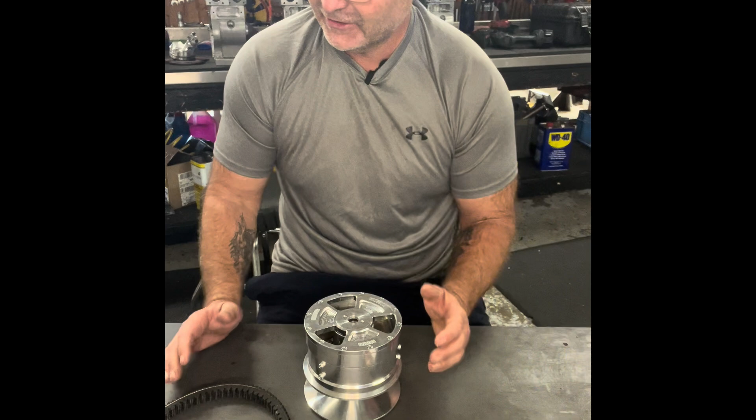We'll get really technical on some of the things that adjust how quick or slow your reaction time is on your clutch. So here we have the polar primary, the belt, a keyed primary post, and a spline primary post.

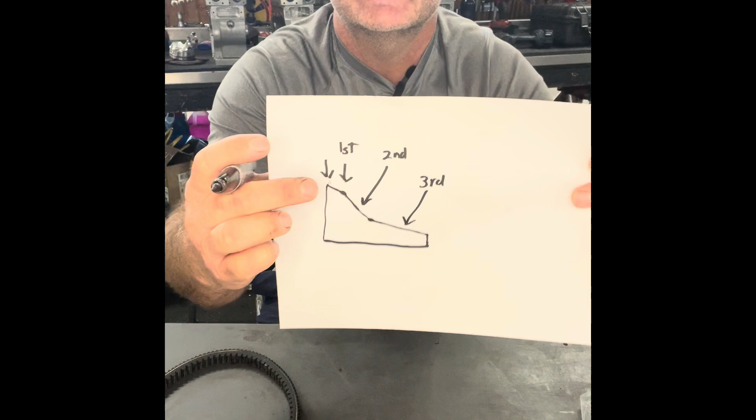Don't mind my drawing, I am not an artist. So if you see the ramp here, this is your first angle, your 15 degree angle. And then your second angle. And the third angle. So you've got your first angle, your second angle, and your third angle.

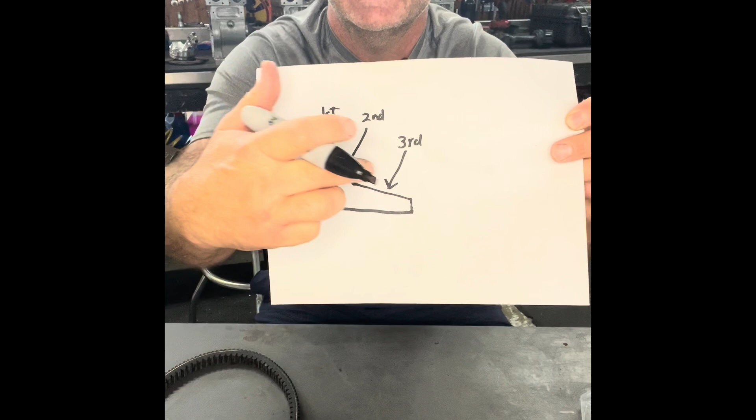So this is a 15, a 30, and a 24 — or it could be a 12, 28, 22, or a 15, 28, 22, or 12, 30, 24, okay? We'll come back to that in a minute, and talk about the easy way of changing your reaction time on the car.

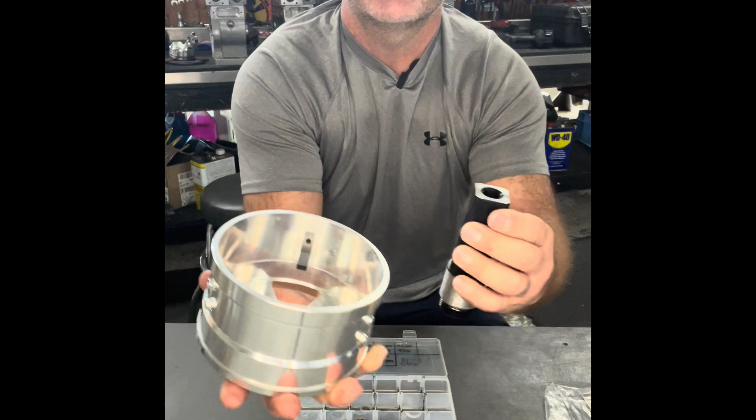So what we have are these shims right here. This shim goes in between your primary post. It'll sit right on top of your primary post, just like that. And then your clutch cover goes right on top.

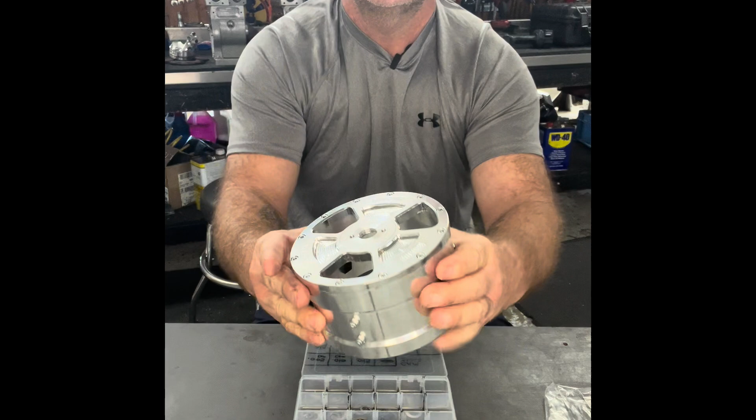So what that does is push your ramps up and away from the clutch. Well, what does that do? Let me tell you.

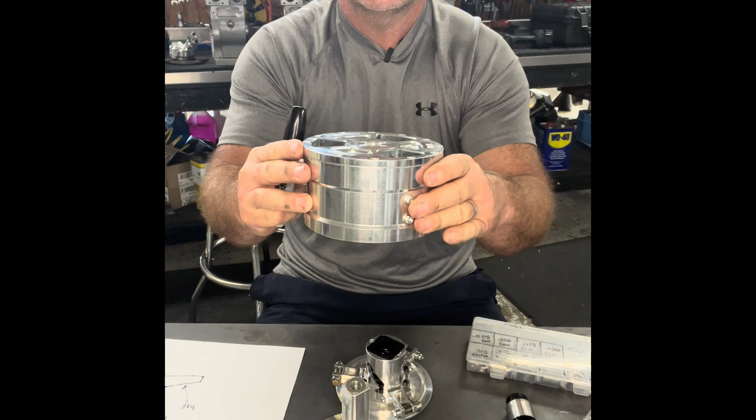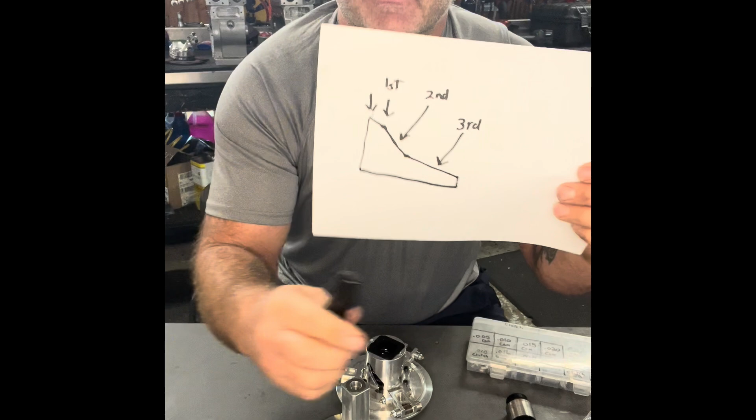In relation to the rollers and your ramps, when you put the cover on with a shim, it is going to push this farther up, which moves the location of your roller. It pushes the first contact of the roller closer to this first angle.

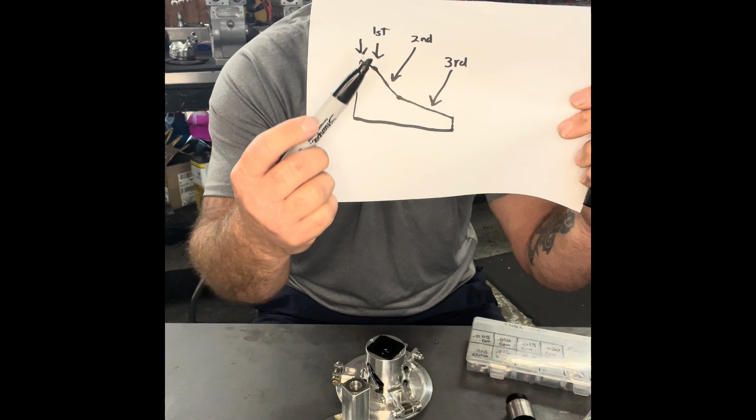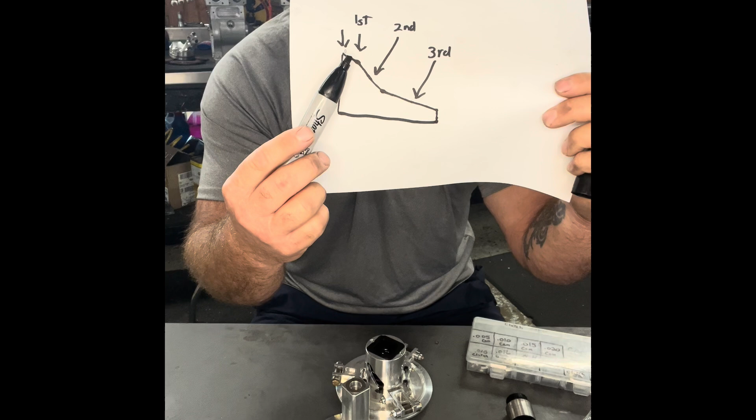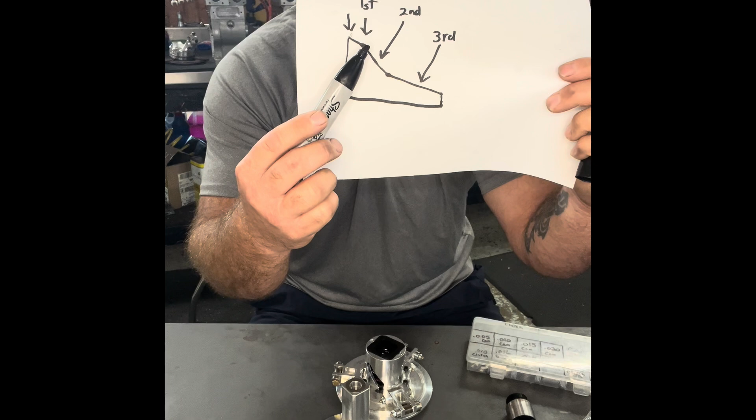This first angle right here we're going to call neutral. When you start your car, your primary roller sits right here on this first angle. When you hit the gas, the roller starts rolling down this ramp, and when it hits the very first angle change, going from 15 degrees to 30 degrees, that's when the magic starts happening and the car takes off.

So if we take that roller location on this first angle and move it this way, the roller has to travel farther before it engages. If we move it closer to this first angle, that decreases how far the roller has to go before the clutch engages — so moving it closer to this first edge speeds up your reaction time.

But there's always a but. If you move it too close to this first angle, the car will take off and sound like it's leaving in second gear, because you won't get that initial flash of RPM.

So if that happens, it's just because you moved that roller too close to that first angle. Let's say our kid is a little slow on the tree and we want to speed them up. We have 10 thou, 15 thou, 20 thou, 25 thou, and 30 thou shims. So if my kid's slow and I want to pick them up a little, you pull out the 10 thou or the 15 thou. If he's super slow and you want to speed them up even more, then you're looking at the 25 or 30 thou.

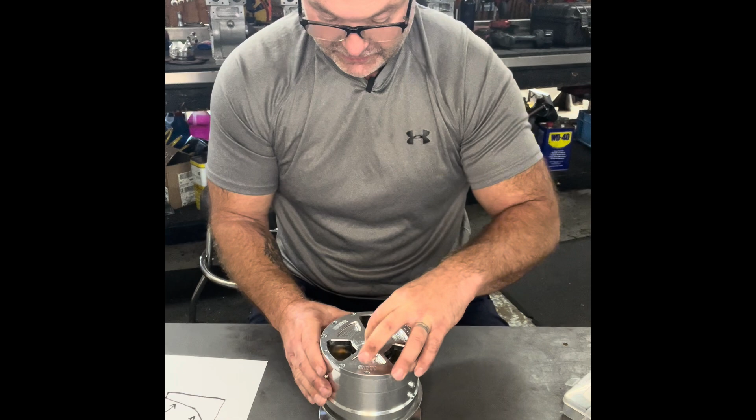Simply that way. You put your clutch back together like that. Take your barrel lock, screw that in, boom, you're ready to go. So this clutch is going to be a little bit faster.

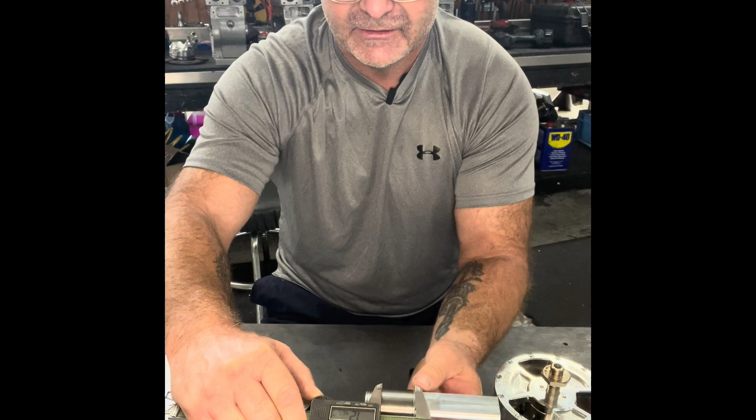Okay, so some of the measurements that you're going to want. Let's talk about the post. This also has a lot to do with reaction time, but there's two measurements here. Basically, you have your belt width. So if you measure right here, this one measures 1.245.

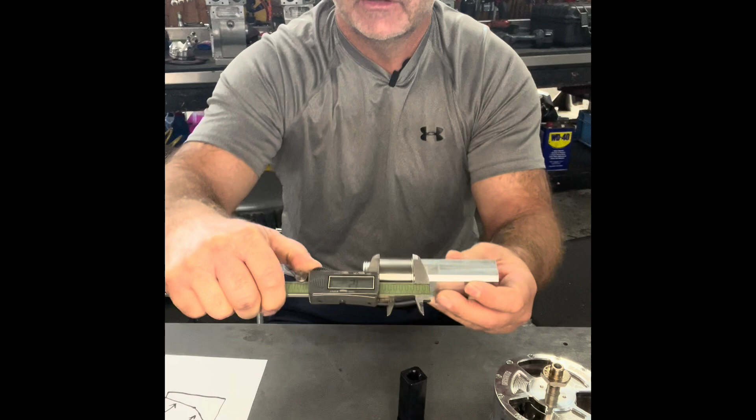I usually like to see these about 1.230. The reason for that is the width of the belts. Used to be the belts were 780, 790 wide. Since then, they're now 800, 815, 820 wide. Used to be, we used to cut this down to 1 inch, 220. And since the belts are a little bit wider now, we actually only cut it down to 1 inch, 230.

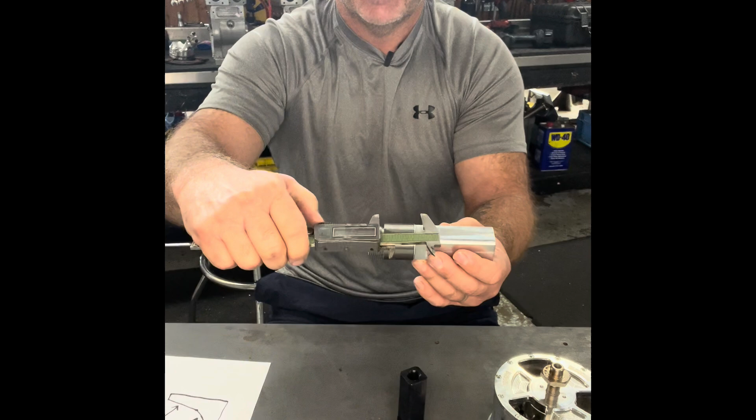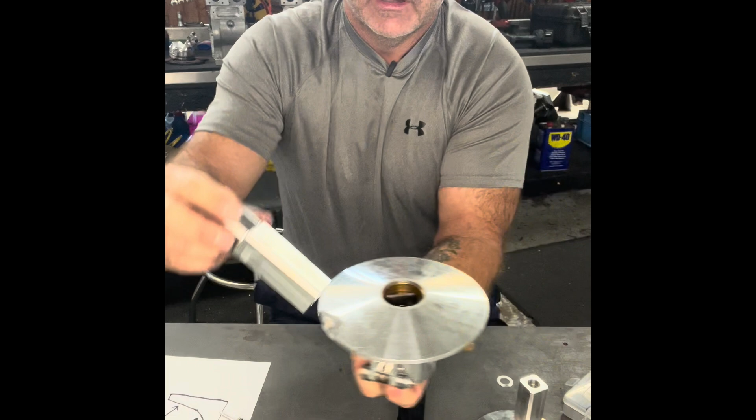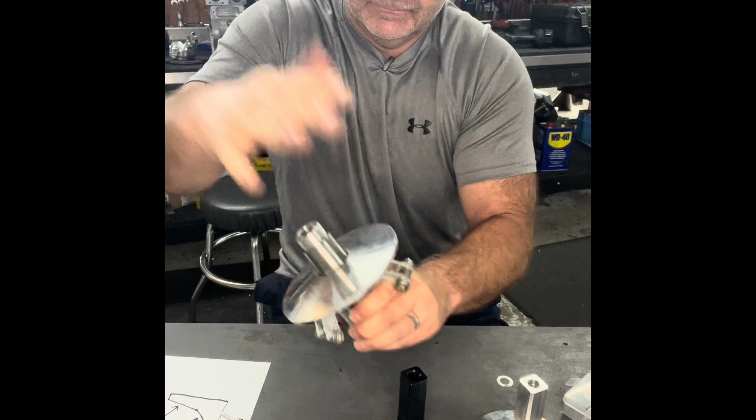So that's kind of where you get your air gap from on your clutches right there, because what happens, your movable part on your clutch comes down and you've got the square washer in there. Well, that square washer is going to lay right up against that shoulder. So when you slide it in like that, I can't push it in anymore. So that's where it bottoms out right there. And that's where you get your width right here from your belt.

So what does that have to do with reaction time? Has to do with belt gap, your air gap on your belt. You know, you got your belt. Yeah, we're going to be jumping all over here, guys. I'm going to try and explain everything as good as I can. So you got this together.

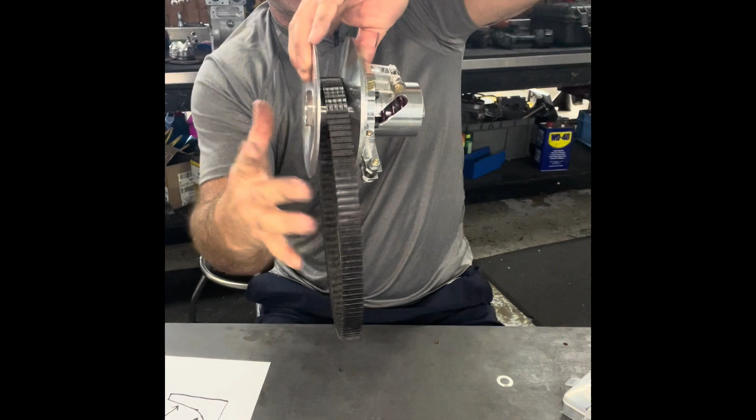So when this starts to engage, it starts to push together. The spring will start to compress. That's when this clutch engages. So when you're sitting there idling, this is going to be the width right here. You take this and you push it until it bottoms out. It bottomed out, so there's your width. You throw your belt on, hold this together, kind of pinch that belt, and then you take a feeler gauge and you put it on the side of the belt. If you can see, I'm moving that belt back and forth in there a little bit.

So this has air gap, and just guessing, there's probably about 60 thou worth of air gap in there. So when I cut this post down, because this post hasn't been cut down yet, when I cut that down, then it's going to be probably around 50, 60 thou worth of end gap in there, okay?

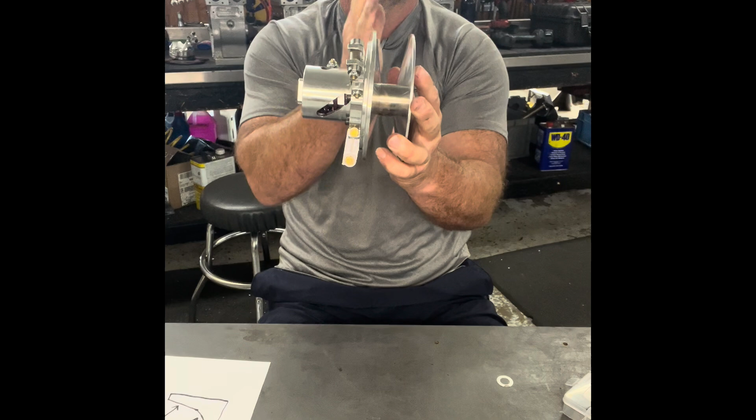So that has a lot to do with reaction time as well. Obviously, the less air gap that you have, the shorter time that it takes this movable sheave to start coming over and grab that belt. So the less air gap would essentially speed up reaction time. More air gap would lower your reaction time. And again, you have to be careful, because there is a point when you go too far and there's not enough gap that your clutch doesn't have the RPM flash, and it falls on its face.

So again, you have to be careful. Just like on the ramps, it'll do the same thing on the ramps. If you get too close to that edge, it won't allow the motor to flash up in RPMs. And what I usually mean by flash, you're usually idling at about 4,000, 4,500. Right when the kid hits the throttle, if you watch that tach it'll flash up to 68, 69, 7,000 RPMs. And then the belt grabs hold of the clutch, and that's when it starts taking off, okay?

All right, so the first thing, the easiest way is shims. Putting shims on your 10, 16, 20s. That will push the cover up farther, which puts the rollers closer to this first angle, okay?

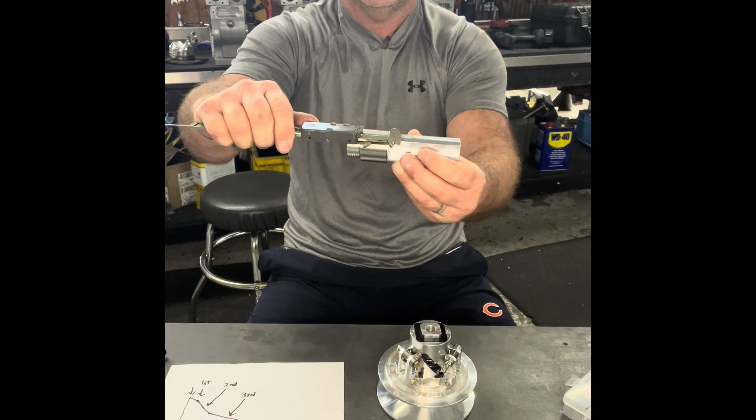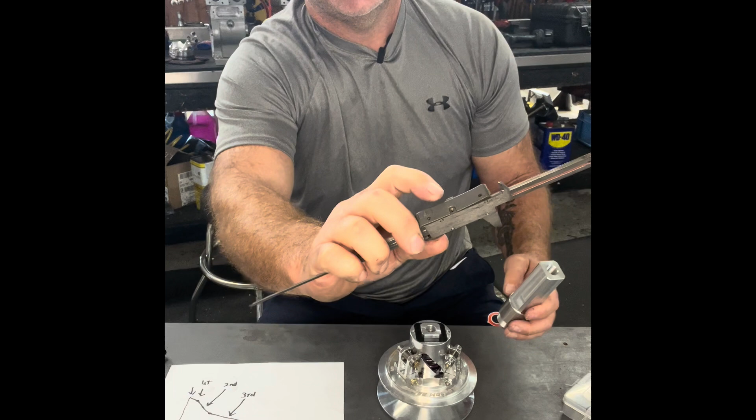And then we have that measurement, which is belt width, all right? And then the other measurement that we're going to have is going to be the post length. So from this shoulder to the tip of the post, sliding your depth gauge on your calipers down. Oh, and your calipers need to have, you're going to be your tenths, your hundredths, and your thousandths.

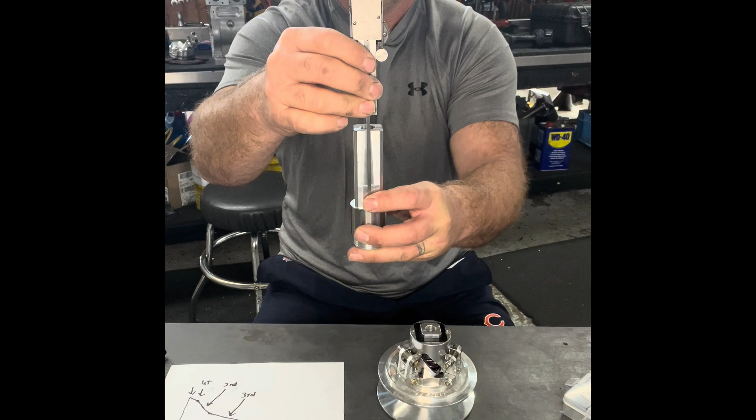You need a pair of calipers that has that many numbers right there, not just two numbers after the decimal point, okay? Those don't work. You know who I'm talking about.

So sliding this down, we're about 3 inches, 120, 122, right in there. That's the normal length of one of these primary posts.

So let's say you're going red all the time. You can either increase your belt gap, or if you have shims in there, you can take the shims out. Another trick is you take the end of this and cut 10 thousandths off of it. You'd want to do that in a lathe because you want it straight across, not cut on an angle with a hacksaw or anything.

So if you want to slow down your reaction time, you can cut some off of this, 10 thou, and it's not a major deal. Let's say you cut 10 thou off this, and then all of a sudden your kid is having really bad lights, 500 lights, 600 lights, just having really bad lights. So simple, you want to go back the other way, then that's when you just take a shim and put a shim back on the cover.

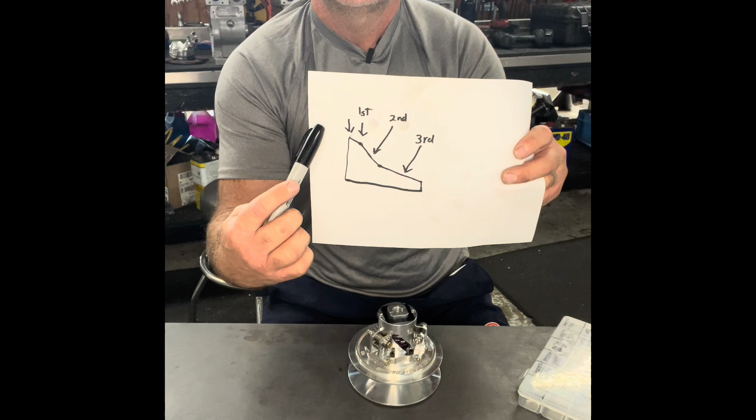So cutting this off takes the roller on the first angle and moves it back this way. Cutting it off is going to slide the rollers back up your first angle of your ramp. So now your roller has to go that much farther before it engages. Your engagement is basically this first angle.

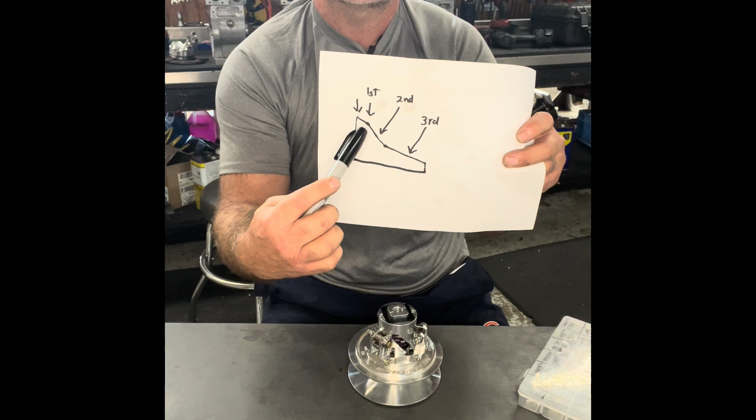So what some people do is they actually cut these off. They'll cut 20 thou off, and then you can really play with it by stacking a 30 thou, a 10 thou. You can actually adjust it.

Every day of racing, he goes out one day and your kid's cutting perfect lights, and then he's really slow on the tree. You can adjust this. The key of everything is if the kid's really consistent on the tree.

If your kid goes out there and he's cutting red lights, or she's cutting red lights all day long, and then throws in a couple really slow green lights, and then red lights, and then slow green lights, those are going to be a lot harder to adjust and play with on your clutch.

But if you can get a kid to hit that tree at the exact same time every time, you can actually bring the clutch to them.

So that was the spline post that I measured for you. Here is the keyed post. This one's 3.120, 124. Same thing, 3.120, 124, right in that ballpark, okay?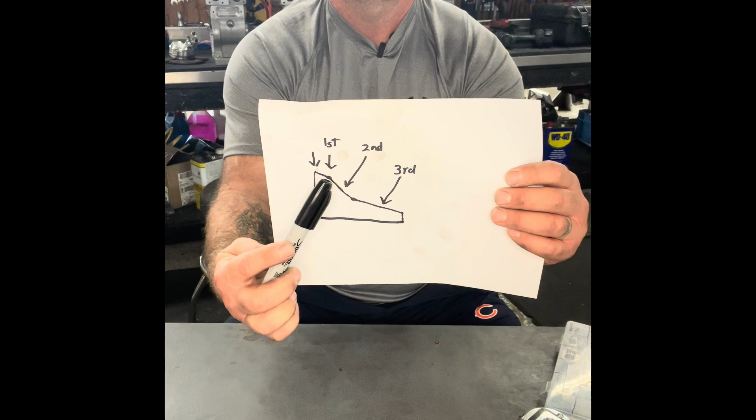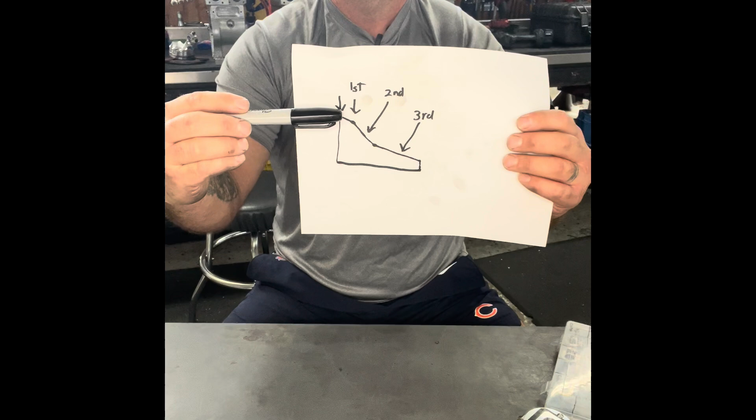Well, okay, in reaction time, which one is going to react faster, a 15 degree or a 12 degree angle? We're talking about this first angle right here. So if this is a 12 degree angle and it's laying a little bit flatter and you hit the gas, it's going to take that roller longer to move to that first angle. So essentially that is going to slow down your reaction time. It's going to raise your RPMs a little bit because that roller is going to dwell on this first angle a little bit longer.

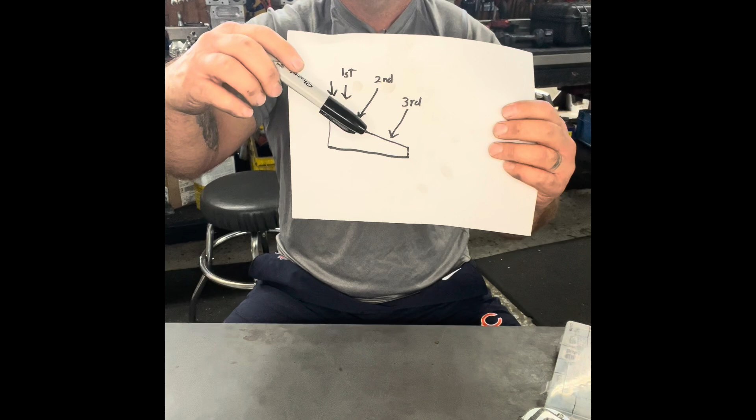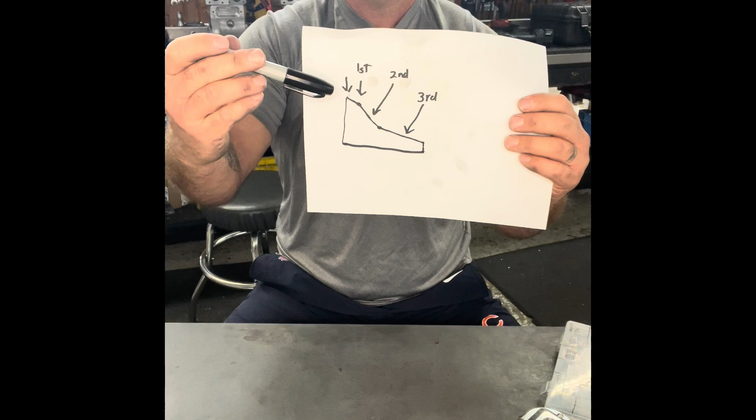Okay, so now let's change that to a 15 degree angle instead of a 12. So we're going a little bit steeper now. So when that roller's on here, you're going to hit the gas, it's going to engage, and it's going to run a little bit faster. So your RPM engagement's going to come down, and it's going to engage quicker. The roller won't have to go nearly as far to that first angle. So a steeper first degree angle is going to react quicker.

Okay? So reaction time wise, if you had 12, 30, 24 ramps in your clutch and the kid was a little slow on reaction time, you could go to the 15, 30, 24. So the 30 to 24 is going to be exactly the same, we're just going to change the first angle, make that a little bit steeper, which means that clutch is going to react quicker. The other most simplest way to adjust reaction time is RPM, what you're idling at.

So if you were to take your belt off your clutch, start your car up, and then slowly rev up your RPMs, and right when you see the face of the clutch, the movable part, pop over and kick in, you want to look at the RPMs and see where your clutch is engaging.

That'll give you a reference point of where your engagement is. So how you can use that is to adjust your RPMs of where you're idling. Let's say this pops over at 4,600 RPMs. Obviously you're not going to want to idle your car at 4,600 RPMs.

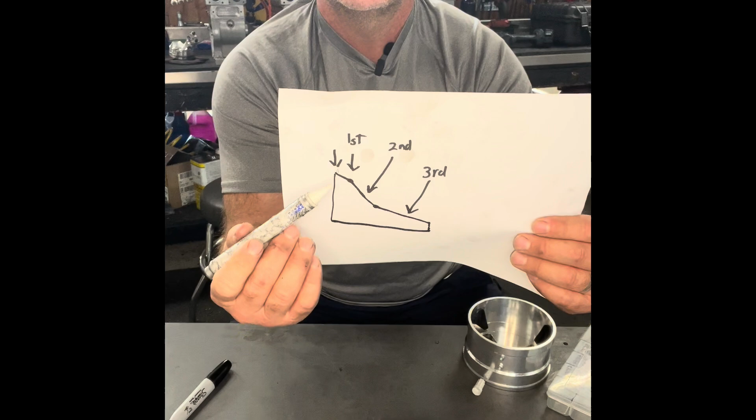So what I typically do on my clutch is I take a white paint marker and I'm going to color up the first angle, the 15-degree angle. You can do it on all of them. Again, this is going to be very helpful also for reaction time.

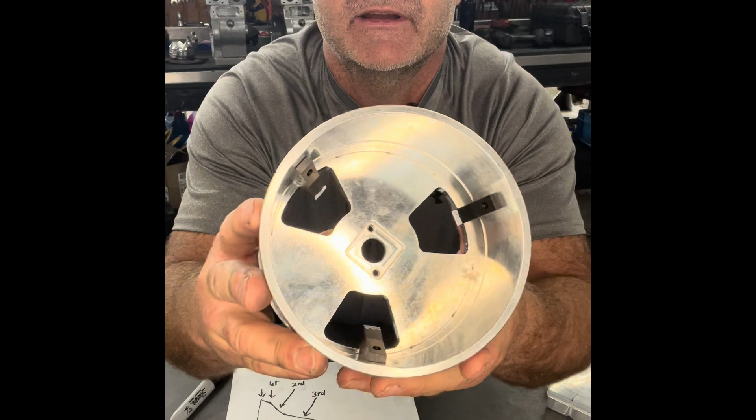Putting your shims in or taking them out, and then looking at your ramp. If you look at the ramp in there, see how I put white on all the tips of the ramps.

Then what we're going to do is we're going to put the clutch together, just like this. And here's the other thing I need to explain a little bit to you about it. Give me just a second — let me put this in the vise and get her tightened down so I can show you another aspect of this.

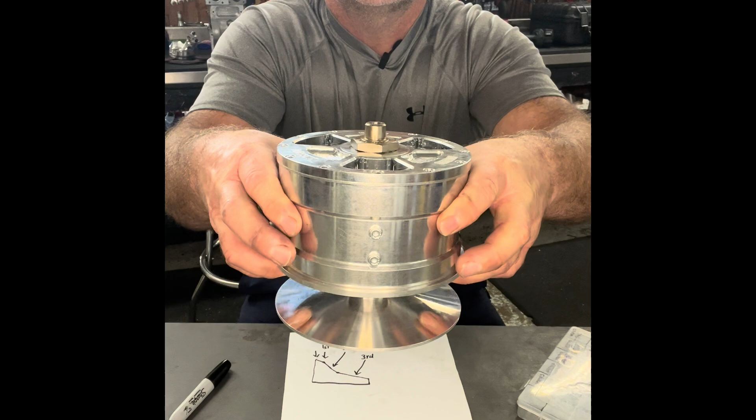So all your clutches should have movement. Your sheave, your movable sheave, you should be able to move it. If you look, I'm just squeezing it — you see how that's moving?

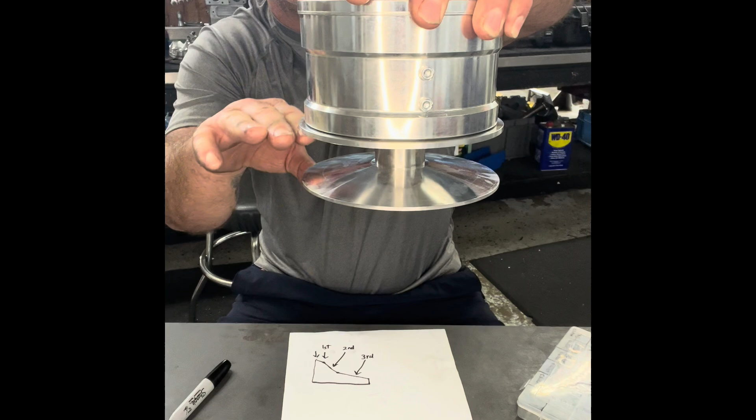So when you test this to get these marks, you have to make sure that movable sheave is all the way up against that post. Remember earlier, I slid it on here and it bottomed out right here. What you don't want is you don't want that up like that — you want your sheave down, so you want to hold it.

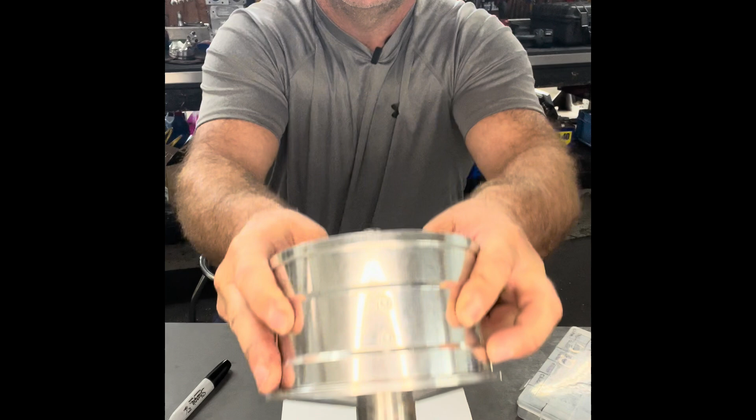So how I do it is I come in here with my thumbs inside and I'm pushing on the arms, and then I'm just flopping the arms and spinning the rollers. So what that's doing is putting marks on that paint I painted up. I'm holding this down — it's not engaged, but it's up against your spring in there, your little spring retainer, all pushed up against it, which is in the engagement ready position.

And I'm just going down in there, taking my rollers, hitting them up against the paint, and getting some marks transposed onto the roller. Let me get this back apart real quick — take me just a second.

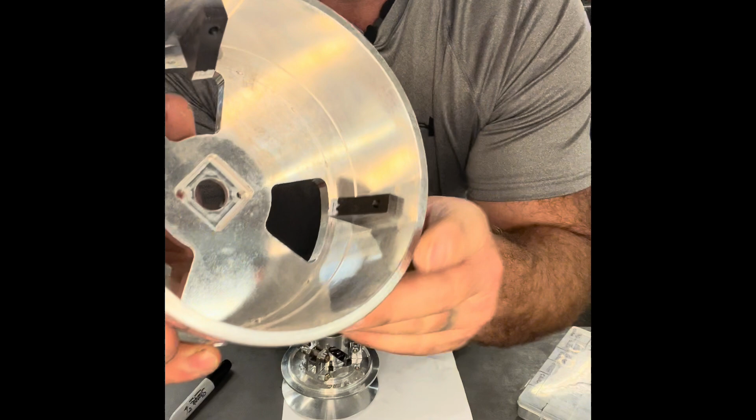And once we got this back apart, we're going to pull the cover off. If you look down in there on your ramp, you can see a little line right where the roller hits on the ramp. You can see that little line right there.

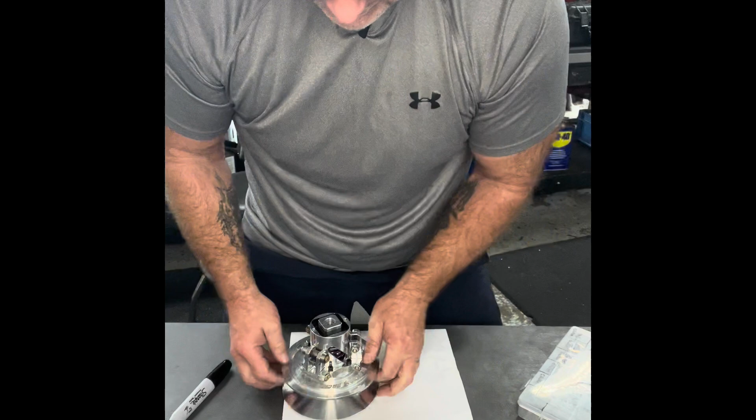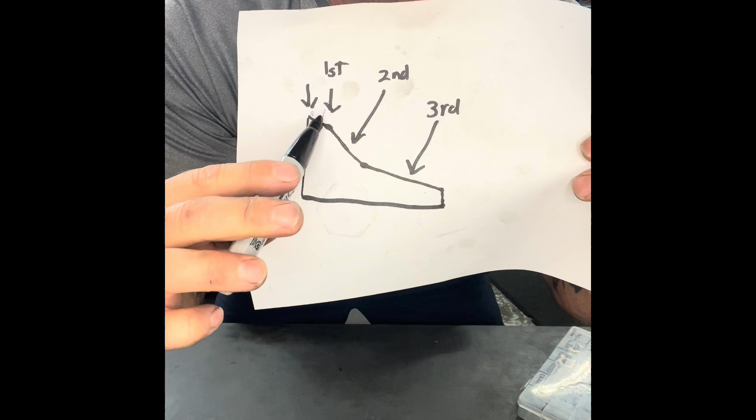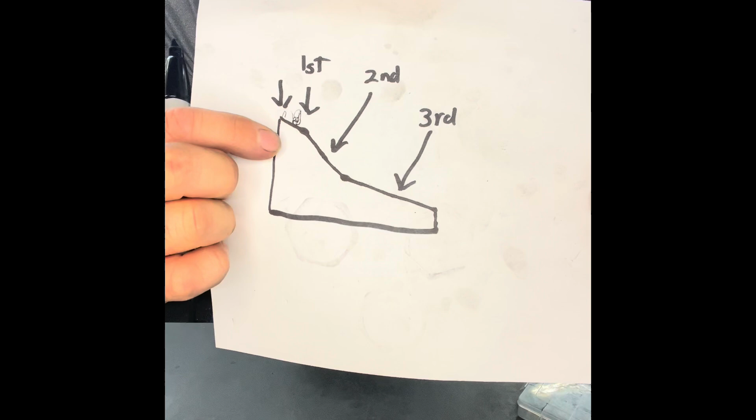So what does that line mean? That line is going to talk about reaction time. So let's pull our chart out right here. Let's say my line is right in here. My line is touching right there, and that's where the roller is hitting the ramp.

Now if I move that location of where the roller hits, let's say I want a faster reaction time. I'm going to move it closer to my first angle, but you have to be careful moving it too close to that first angle. Typically what we found, and I'm sure it's different for every clutch because belts are different and tensions are different, usually within about 60 thousandths, measuring from that first angle back, you want that mark to be about 60 thousandths. That's typically where we start. Any closer than that, you're going to get that falling on its face feeling, like it's leaving in second gear issue. But it may be different depending on your air gap.

If you have a lot of air gap, a small belt, you may be able to run it closer to that first angle. Simply adjusting where that roller sits on that ramp is either by putting shims in or taking shims out to move it to get a different reaction time.

Whew, yeah, these clutches can be quite exciting. So I think reaction time wise, that's pretty much the gist of it. Weights on your clutch usually don't change your reaction time very much. The main things that will change your reaction time are either car-wise, spindles, or getting into the clutch.

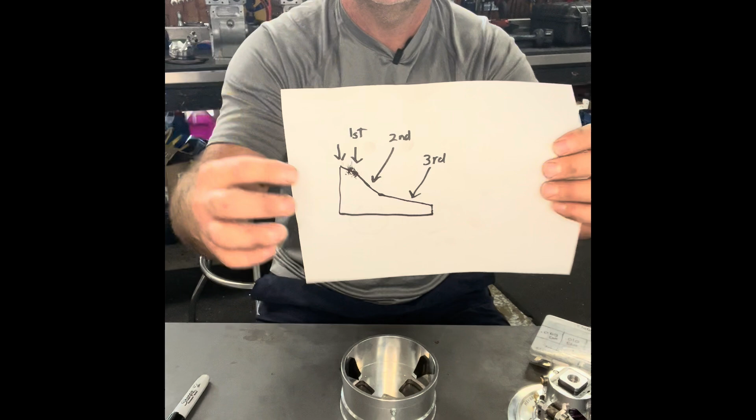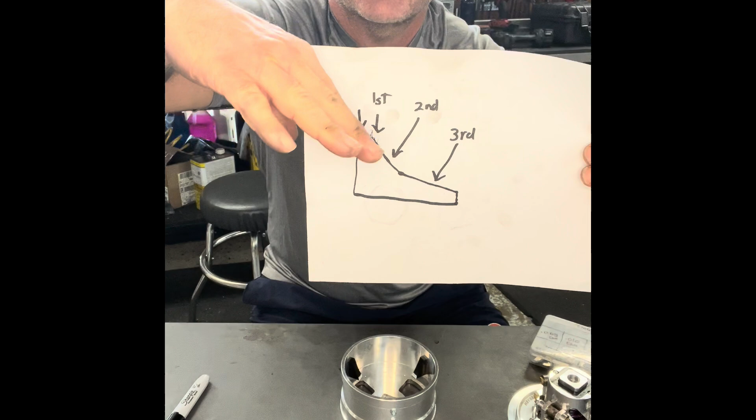Ramps, the first degree, the first angle of your ramp is basically your reaction time angle. A 12 degree is going to be a slower reaction time. A 15 degree, steeper angle, quicker reaction time. The other angles are just down track, about how hard you're going to load it.

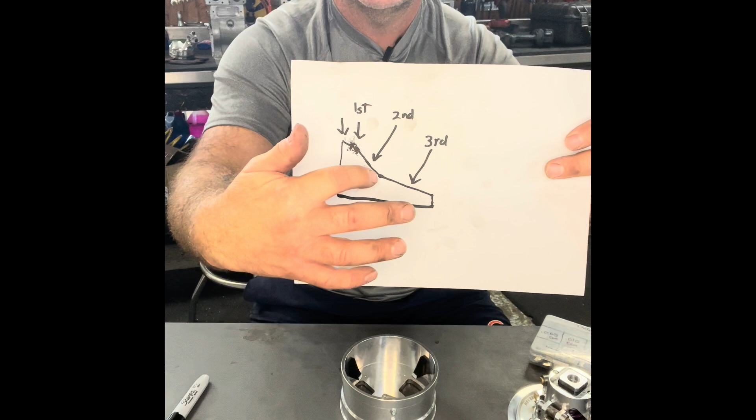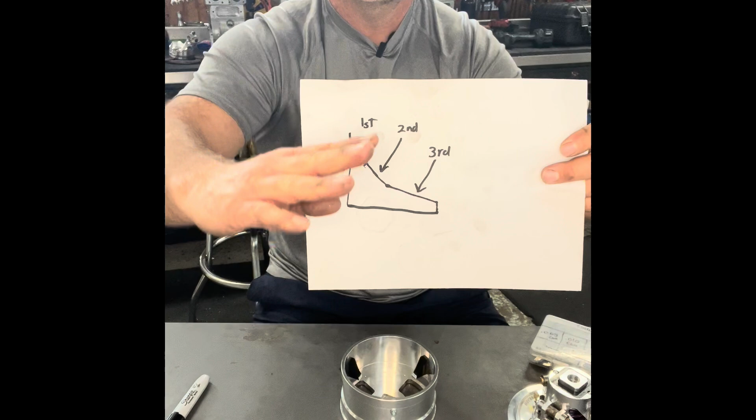Angles are going to determine where you're going to shift down track. A steeper angle, you're going to shift earlier, lower RPMs. A shallower angle, the car's going to go farther down track, higher RPMs before it shifts.

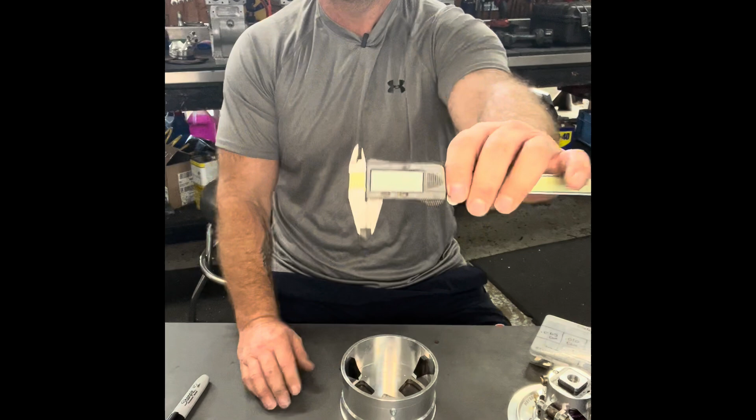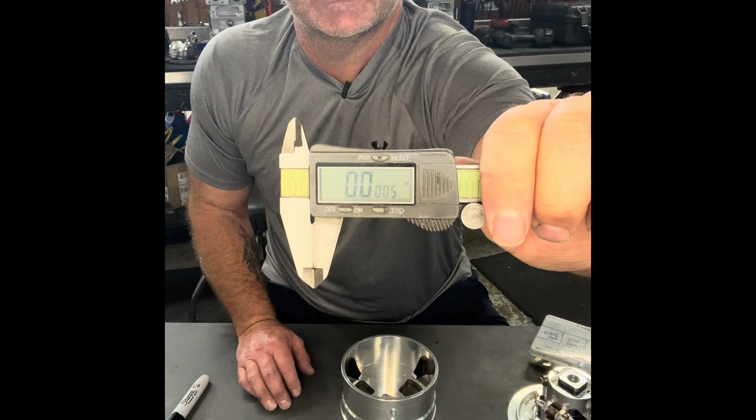Okay, follow all that? Alright, calipers. If you're going to get calipers, please get the calipers that have more than just 2 digits. This one has like 4 digits right after the point, so you got the 0 point and then 4 digits. Those are the best ways to go. The 2-digit ones, I bought a couple of them a month ago and I threw them all in the trash because they're absolutely useless. So don't use those.

So if you have any questions or see anything that maybe I missed in this video, please shout it out down in the comments. Let me know, I'll come back on and do a revision and see if I can address any of the questions that I may have caused you to have during this video, but hopefully I explained it and you guys understand it.

So hopefully that helps you guys out, and you can feel a little more confident now adjusting your RPM engagement, your reaction time, and get you guys down that track and hopefully in the winner's circle.